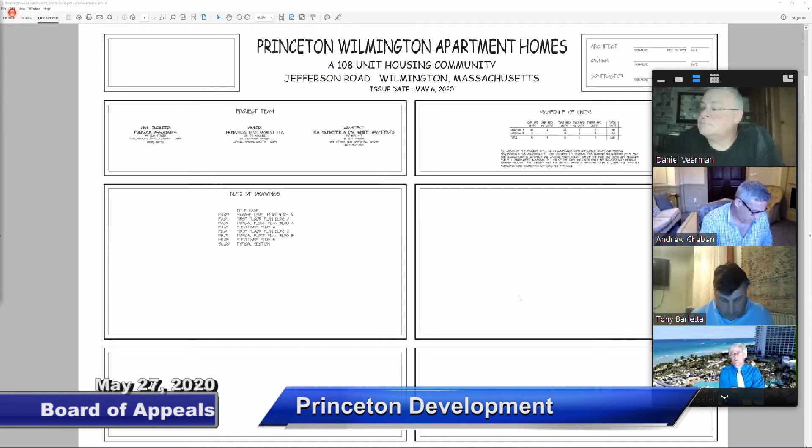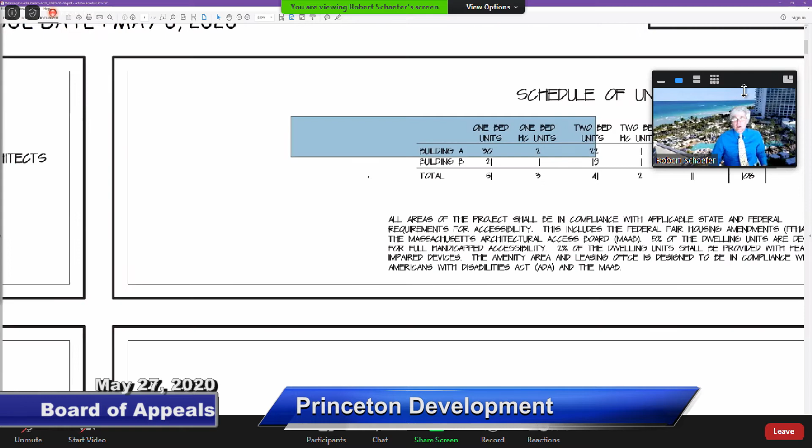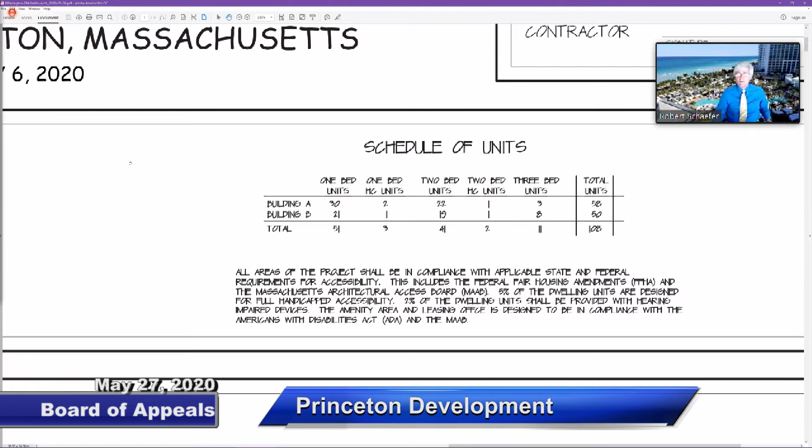So I thought I'd walk through the drawings that were submitted, using those as a way to walk through the project. First, I'll bring up the schedule of units on the front cover page. We have 108 units: 51 one-bedrooms plus an additional 3 one-bedroom handicap units, 41 two-bedrooms plus an additional 2 handicap two-bedrooms, and then 11 three-bedroom units to comply with the 40B requirements.

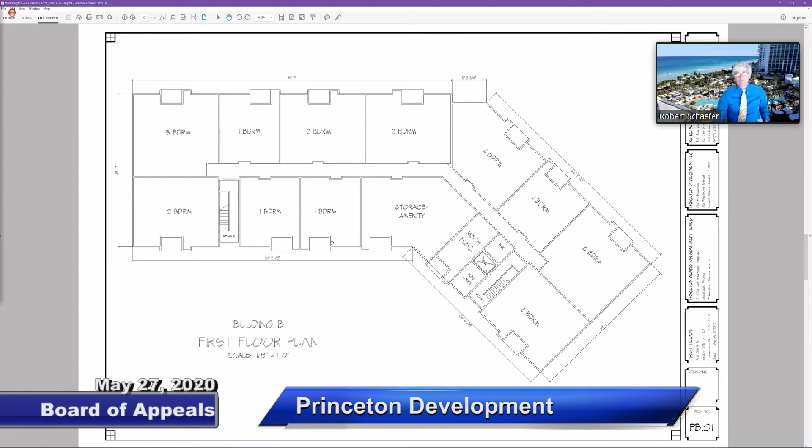When we go to building A, on that first floor there's a community office area which would have the fitness area and the leasing office, located at the upper right end of the building close to the main entrance, using the elevator or stair to access the leasing office for the project.

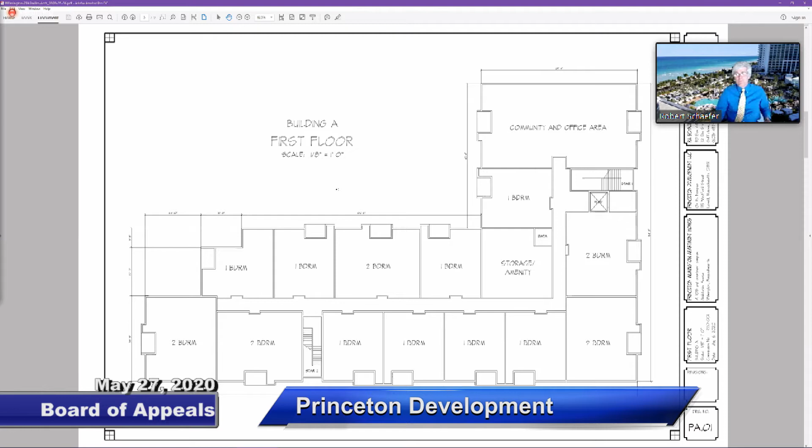And if we go one floor down from there, we have the parking under building A for the 46 spaces as laid out. In the lower right corner would be the mechanical electric room. We have 2 handicap spaces in there with the aisle between them for direct access to the elevator across from it, right in here. The drive entrance comes over from the left, as you saw in the site plan earlier, so that would come in as a garage door, accessing down through the building from that direction.

We also provide these small storage areas around the perimeter of the building that align with the floor footprint above. So we would provide tenant storage or bike storage and things of that nature for the tenants to utilize on this floor, as they so desire based on their request.

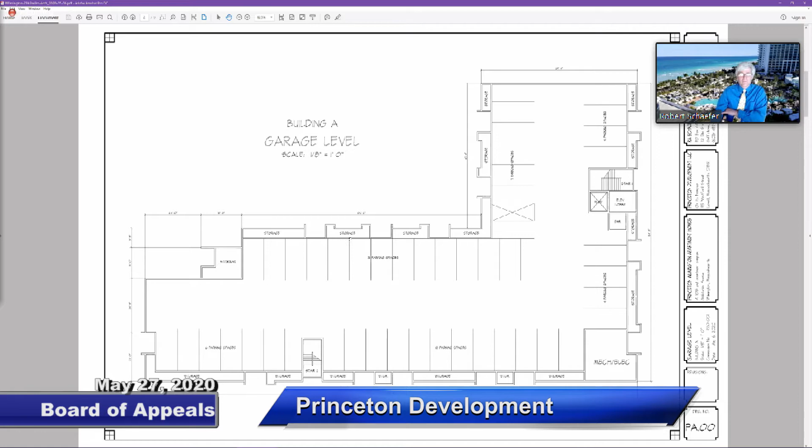Let's jump to building B. This is a slab on grade building, modeled after the Princeton North Andover type project, which I'll show you pictures of in a moment. We're maintaining the building height at 49'10" to the midpoint of the roof slope, utilizing a peak roof, which I think gives this project a better look.

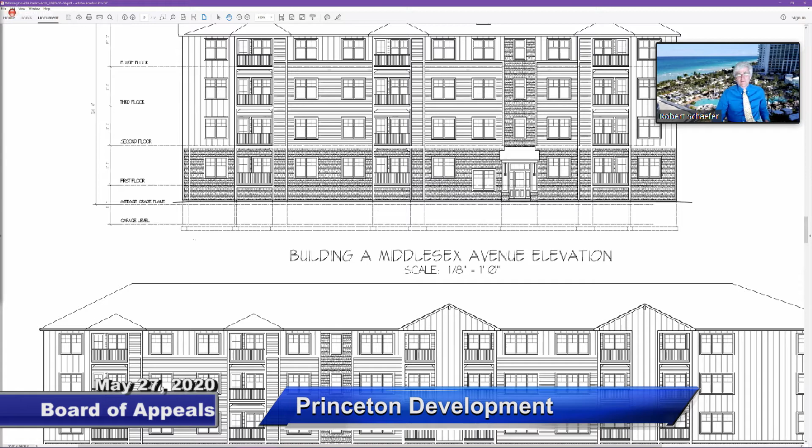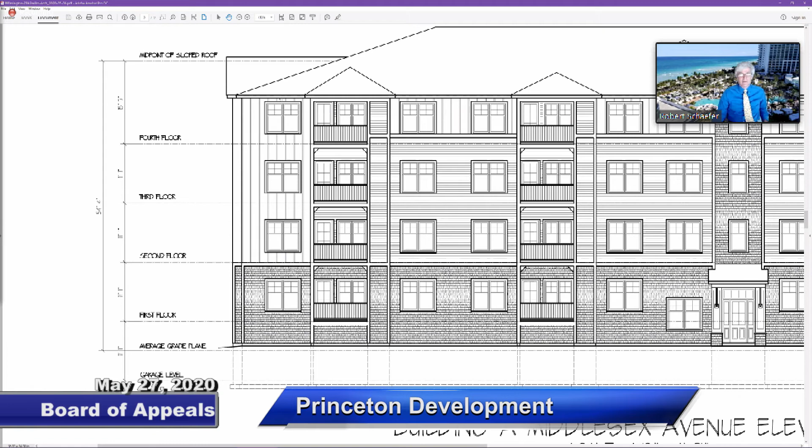And so we can maintain that 55-foot height easily with this building, being a slab on grade with 4 stories, which provides a 9-foot ceiling for all the units on all floors, and good sized windows for a comfortable Class A apartment. On building A, that same unit size and ceiling height remains, but it's pushed up a little bit to allow for that garage level underneath, so that portion to maintain the 4 stories is below grade, with a small portion above it to deal with the site issues we had to work out based on soils information that we got. So this allows us to still maintain that 55-foot limitation to the midpoint of the roof as defined by Wilmington's restrictions, and I think it provides a better cap for the roof.

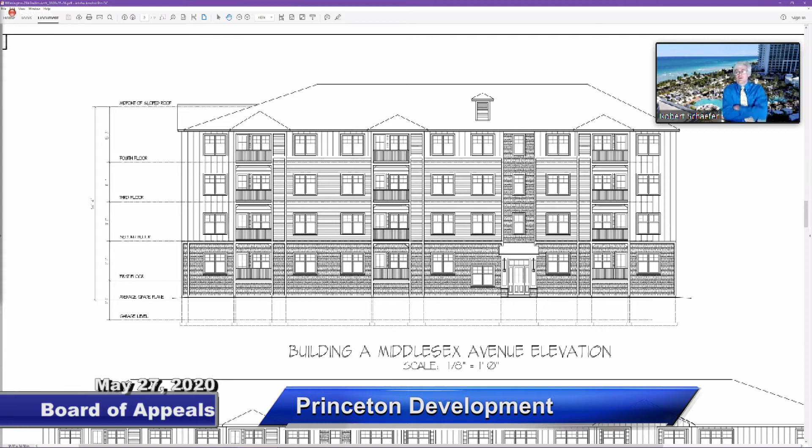Now, as you can see, doing a mix of materials, we have the board and batten at the ends and across the top to break up the height of the building, with clapboards in the middle two floors, a few elements like shingles from below coming up to above, and then shingles spread out around the bottom to give it a nice base level to the building.

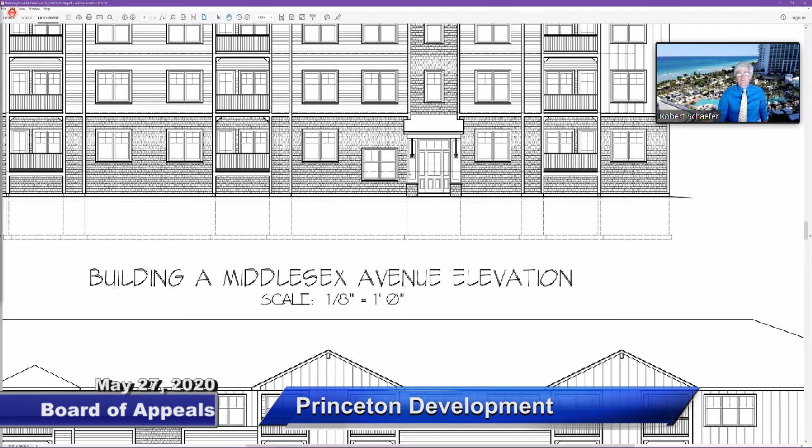The entrance areas have a covered roof and vestibule at each entrance. This is where you can see how the elevator has to be a 2-sided elevator in order to accommodate the grade midpoint in the floor. So you would enter at this level, go to the elevator, and then go up half a floor to the first floor, go down to the garage if so be it, or come from the garage and continue up, then go up a half flight of stairs to the amenity area, which is right in this general area.

Let's see, I think I've got to share each picture. So let's see, where did the pictures go? I had them open. Share that. Why aren't they... There we go.

Okay, so this will be an aerial view of the Princeton project in North Andover, showing how these are all slab on grade buildings. They'd be the similar configuration as building B for the Wilmington project. You can see the entrance area with the covered roof, you can see it there on the left building between the cars. This is a little bit shallower slope roof, but in Wilmington we were able to get a bit more pitch in it, which would help give it a better roof slope, as you saw in the elevations.

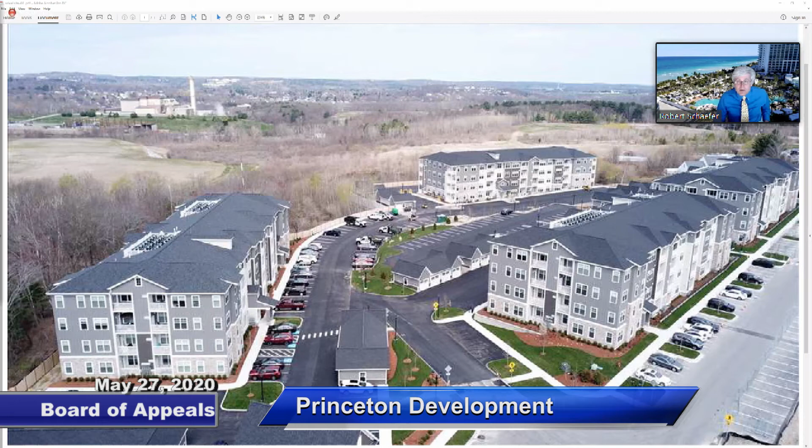Let me switch to the other one and share that. It's the same project from another angle. They're finishing up pavement down at the bottom there, but you can see the same project and its relationship to the site and how it dresses out when it's done.

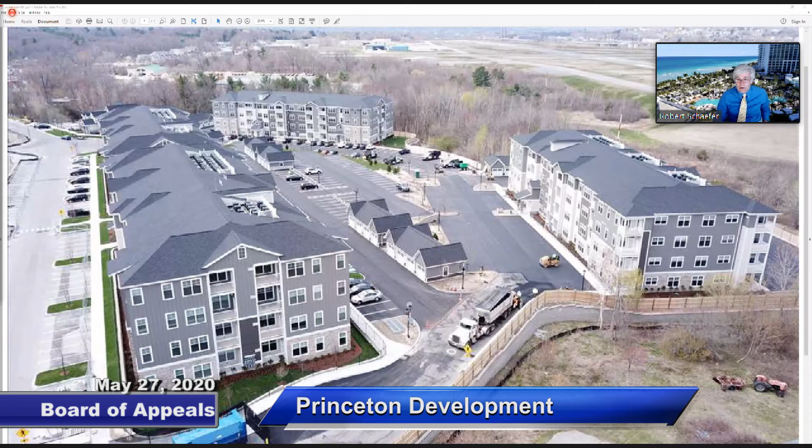Some better pictures of it up close. This one here, let me zoom. There it is, this one. There, so there's the building in its finished state. You can see the board and batten and how they would work, the decks, just to get a good sense and feel for how the project would look.

One other picture to share with you, this one here. So it's the same building over on the right. This one happens to have the clubhouse, but you can see all the relationship of the building over on the right. And then if you look behind me, that would be an example of the pool amenity we would put behind the building, taking advantage of the river and things like that.

Just kidding, just thought I'd throw that out there for fun.

But I think that gives you an overall sense of how the project would play out in Wilmington, following the similar detailing, materials, and size that we did in North Andover. It's being well received, and the residents are very happy there.

So, Mr. Chair, may I ask questions? Sure, let me take off my share here. Hold on. Well, you could leave that.

So in that picture there, what's the height of that building? This one? Which building, Jackie? Well, not the clubhouse, but the one you're looking for, let me give you the other building, the apartment building, this one here with the nice sun. Yeah, that one. To the eave it would be the same height. Let's see, it would be 33 plus 9, about 42 to 43 feet to the eave right here.

All right, so I'm sorry, so building A is how high in Wilmington? Let me bring that up and you can see it clearly that way. So A and B in Wilmington are two different heights? Correct, correct. Remember that the front building, what we're calling building A, has a garage under it. So here's the first floor right there, and then we had to bring it up a few feet in order to fit the garage underneath it. The height from first floor up is the same for building B or the ones in North Andover, but this one is a few feet up, as you can see here. It may get you to that 54 foot 4 inches to the mean of the roof.

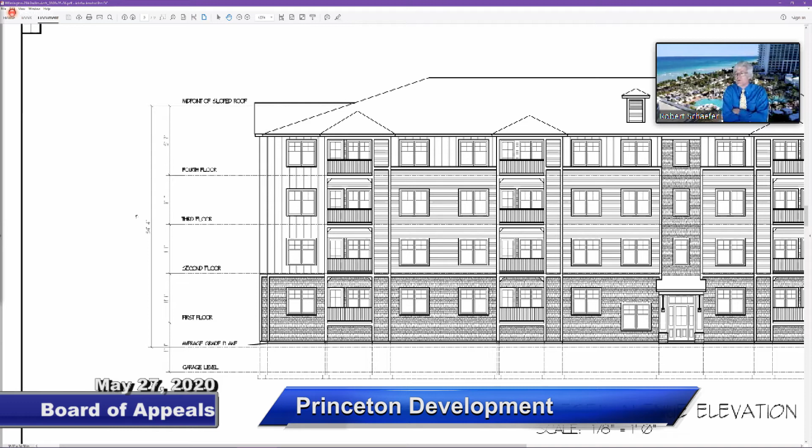And then what's building B, the height? That one's, I think it was 49 feet. I can show you the section here in a sec. Yeah, so this is 49 foot 10. And then, so the one that you just built for North Andover, what is that height?

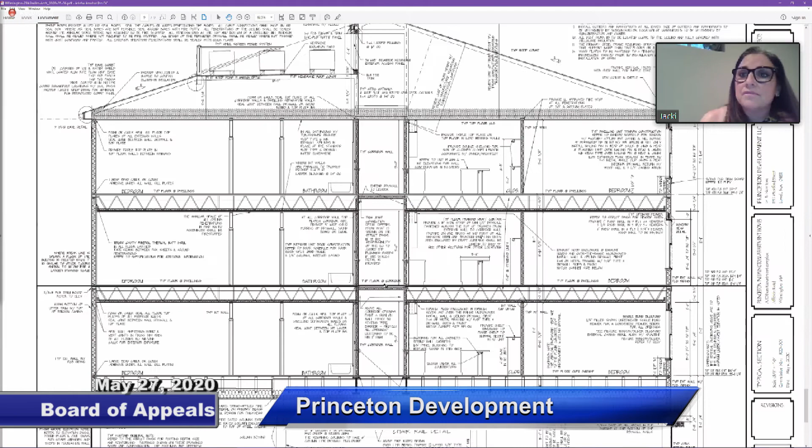To the eave, it would be the same as this, about 43. To the mean roof, it's a little bit lower.

So my point in asking that is, why, if you did it in North Andover, can't you make the one in Wilmington this similar height so it's not so tall? Quite honestly, you're welcome to take a look at North Andover, but it is shallower than I would like. A little bit more slope in the roof helps, I think, the overall appearance of the project.

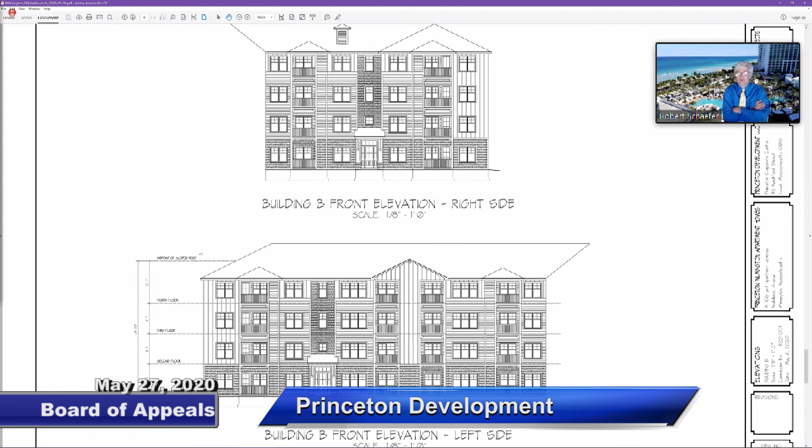That roof, we were restricted by for other reasons on that project, but it is very shallow. It's a 3.5 to 12 slope, and you almost don't even see the roof in certain aspects of the site, where it is nicer to bring up the slope a little bit and get a top to the building, and using that roof to do that helps the project overall, giving it a more finished appearance.

Maybe I can give some clarity to the answer for North Andover. We are up against the Lawrence Municipal Airport there, so the roof heights are somewhat restricted, and the shallowness of the roof was dictated by the FAA. So we went with a shallower roof than we would like, but that is the only thing that was permissible in that zone.

I think what Rob is saying is that to get a more colonial or New England look and give more pronouncement to it, we would like the roof to have a little bit more pronunciation. So that's the difference. But with all due respect, with that pronunciation, you're making it even taller.

In an area where it's gonna just feel like it's on top of you, when that section is so condensed, so dense right now. I mean, you've got 4 stories, over 54 feet high. If you had a way of condensing the roof to make it feel a little bit smaller.

Well, I would direct you to this picture I just brought up, and you can't even see the roof. Yeah, but who cares about the roof? We know. Why do we care? I think it makes a big difference.

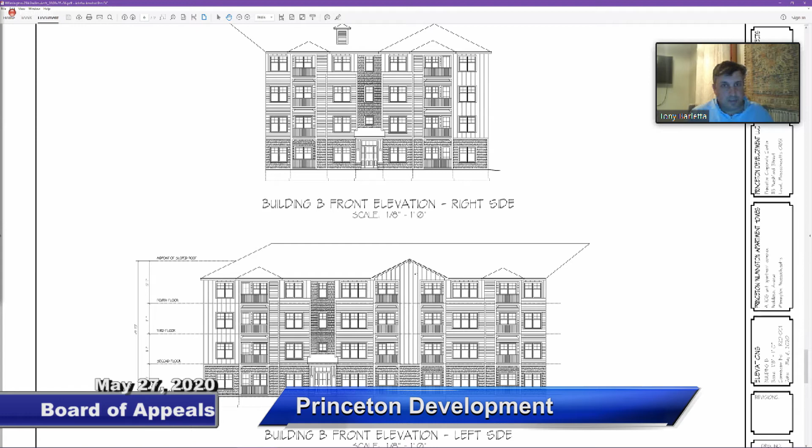And the basement, I believe, is about 6 feet below the existing grade. My question is, has that been engineered, and do you know that's where those floors are going to land, or is that a guess right now? Joe?

Pretty near engineered. We might be a few inches different, but we have looked at the water table. We've looked at other aspects of the project that need to be addressed.

And this is what we're arriving at, should be workable from various aspects. Joe, can you chime in a little bit on that too, since you have more background on it?

You can look at the roof and comment on the roof, but what looks less desirable to me is the fact that the base of the first floor is very perceivable - that it's above the ground.

Unless the building is landscaped well along the building with plantings to kind of mask that, to me that's more of an aesthetic concern than the overall design.

I've seen these buildings go up everywhere, so I understand why the building architecture is what it is. It's that way based on economy, and that's not going to change.

But so my question is about the base. And then you had made a comment, Andrew, I think - or maybe it was the architect - that you guys set the ceiling heights at 9 feet.

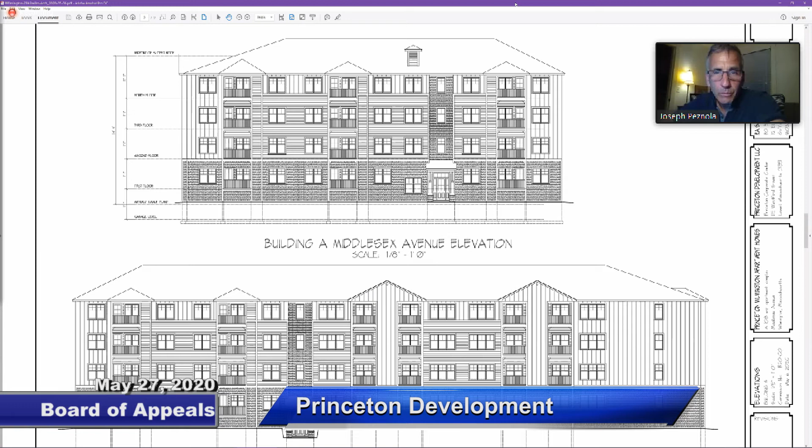We have submitted a very preliminary landscape plan, and we know that during this process we will evolve that based on this kind of input to come up with what the final landscaping will be, which will be our front view, our curb appeal, our attraction to get residents to want to come here and stay here. So we see that evolving as we get through peer review and get some of the technical things behind us, and get down to buffering, screening, landscaping, and the more refinements that we normally see in a 40B process, as it moves through this review process.

Can I ask a question? How... did I ask this?

Could it be possible to switch the building A and B location? So if you want to have the height a little bit less, maybe put B in front and put A in the back.

It goes to parking ratios, and you'd have the same, just lower. No, we'd have more parking in the back because we have more room to do surface parking in the back. So if we also put parking underneath in the back, now we would have an excess of parking for the back building and not enough parking for the front building.

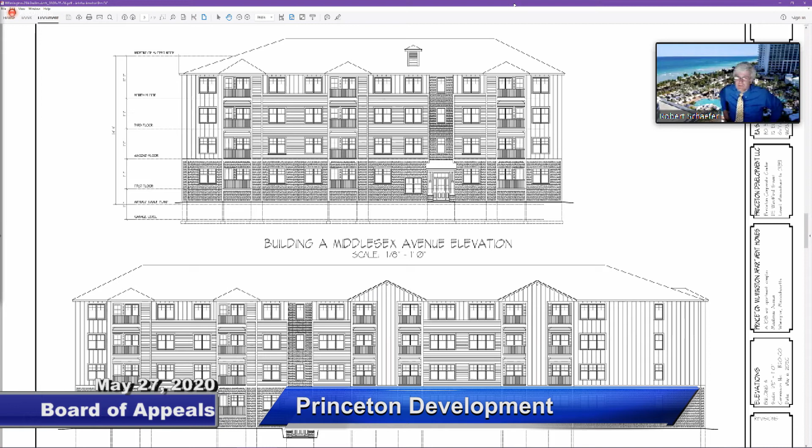Yeah, we have done them in the past, but it wouldn't be a marketable project from what Andrew's saying, though I haven't done one for many years. I think if you're selling the location, they're not going to not go to it because it has 8.5 foot ceilings. It's the location that they're buying into.

I'll let Andrew speak to whether they come to his site or to another project down the road based on that. We would not be able to attract debt or equity if we were trying to build a 1990s project in 2020 - the bank would not look at it favorably, and there's certainly no way we'd be able to attract institutional equity. It's, as I said, granite countertops and stainless steel appliances and crown molding and plank flooring and those kinds of things. We certainly could go back to all carpet in the unit and none of those things, but we would never be able to achieve the rental rates necessary to underwrite the project.

So I'm not talking about changing those items you just mentioned. I'm talking just the ceiling height.

We could certainly look at it, Ms. Santini, but my strong inclination is that we would be putting ourselves at a disadvantage by doing that. We can ask Mr. Schaefer to go back and take a look at the roof line again, but decreasing the units below 9 feet, I think would be an issue, a real issue.

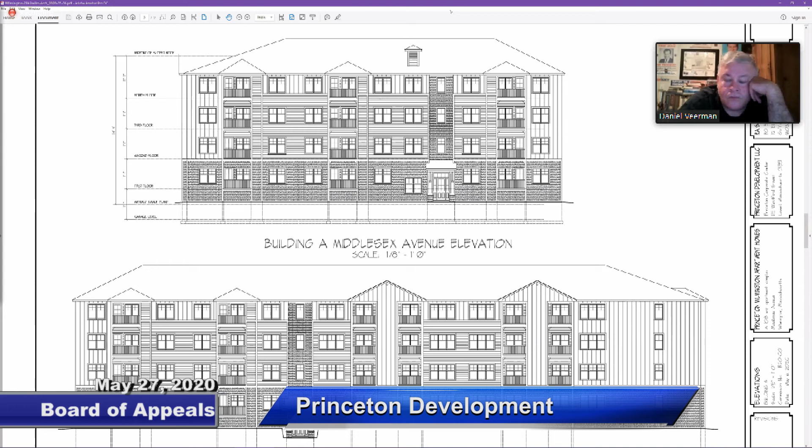Okay, carry on. We've heard from the traffic engineer, we've heard from the architect. I do think for your next meeting, Mr. Chairman, we will take an enhanced look at the landscaping along the front of the A building and give you a more enhanced version of that. So to Ms. Santini and Mr. Barletta's concern about that streetscape, we'll probably do something in a colored fashion so people can get comfortable with the quality or level of landscape we'll do. Maybe we'll zero in on that because that seems like an important point, so we'll see if we can get down into the weeds a little bit on that.

We do have Ms. Gingrich on. I think at this point it might make sense for her to explain where we're headed with the peer review contracts and what the timing looks like on those. We would expect that at the next meeting, both water, sewer, civil, and traffic, we would probably be doing more listening along with the board and listening to your peer review consultant. So maybe at this time it might make sense to bring in Ms. Gingrich.

Sure, thank you. So at the next meeting we are scheduled to have BSC Group talk about the civil site engineering and the stormwater. I think we're going to have the traffic peer reviewer, Green International, completing their peer review of the traffic as well, and I'll be sure to pass along the board's comments from tonight to them.